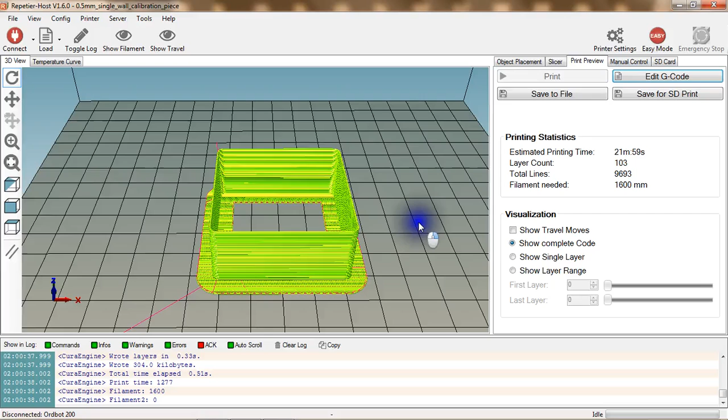Now we will show you the adhesion type options which you can use for printing your objects.

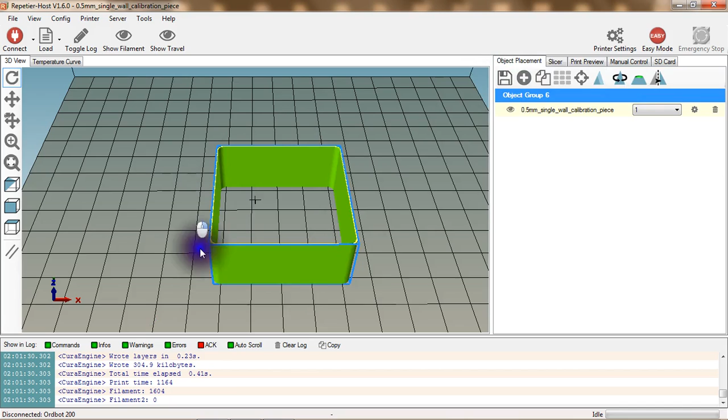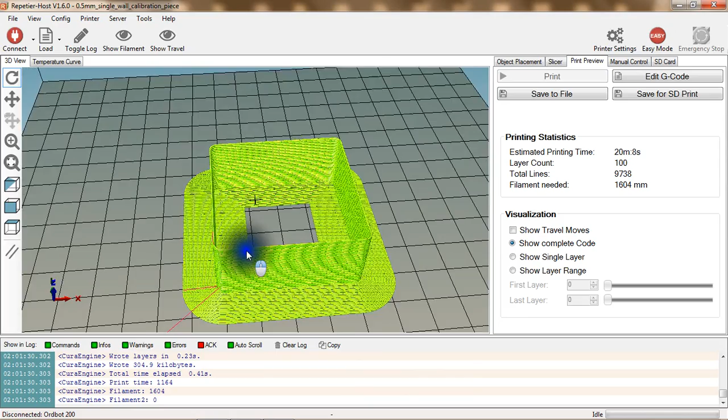Suppose this is your object on the print bed, and if you select brim here and slice it with brim, you will see that the original object is only this much. But if you see the sliced object, this is a part where the inside and outside of the box has some printed part. This is called the brim, which is printed on the outside perimeter of the box and on the inside as well. If this box had been solid, or had a base, the brim would have printed only on the outer side of the box.

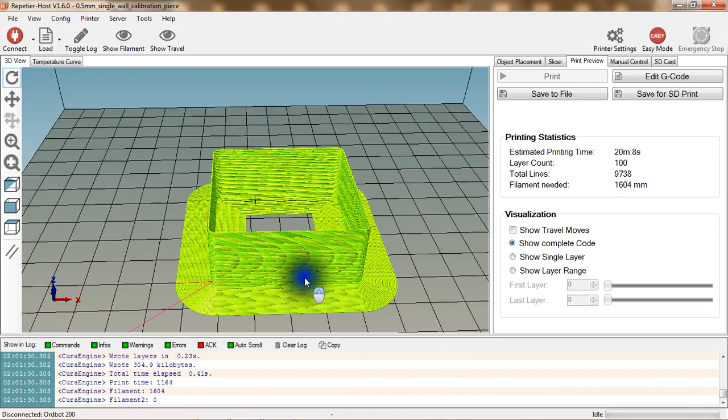The brim is actually useful if the object to be printed has very less contact area with the build plate. In that case, you can use brim to improve the adhesion of the object to the print bed.

Now if you slice it without brim, you will see that there will be no additional part printed, and it will only be the object itself.

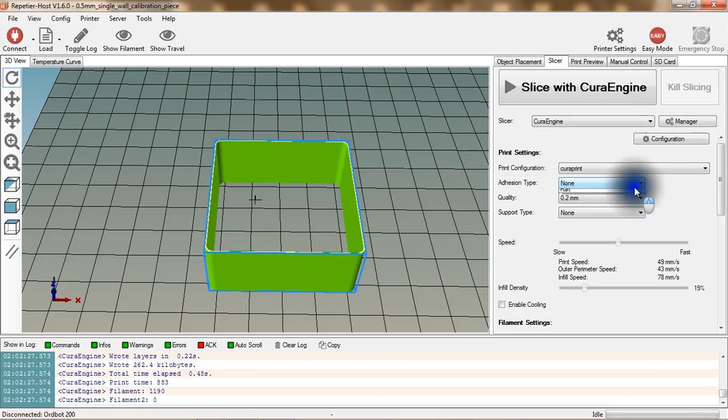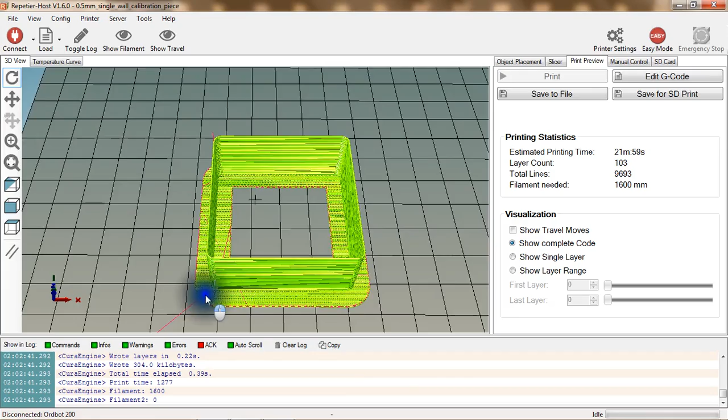Now if you select raft from here, you will see this object. Raft is also almost similar to the brim, but it covers the entire area of the object. So you can either print with brim or print with raft. Generally, first the raft is printed, and above that the entire object is printed.

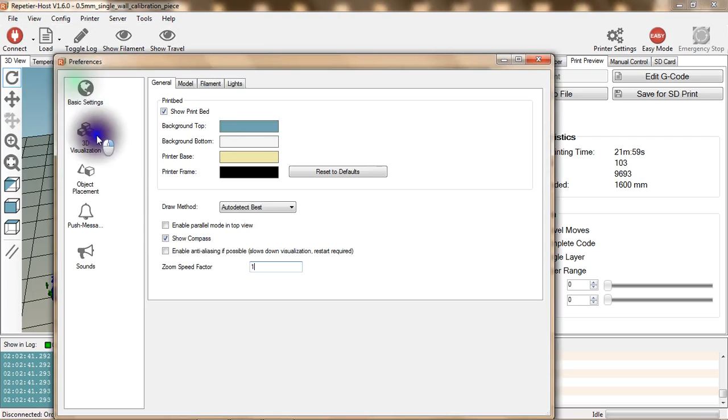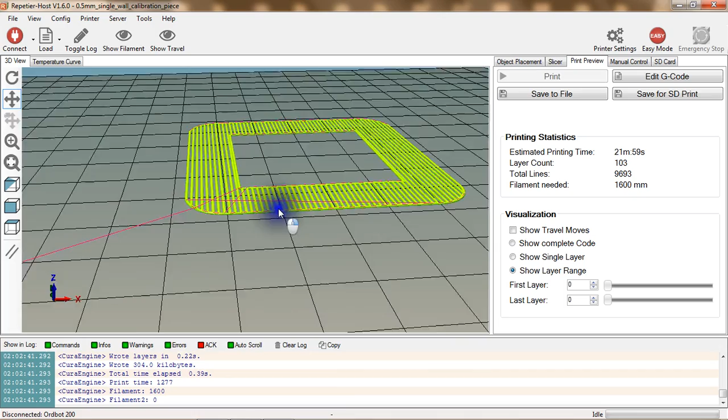Actually what has happened here, I will show it to you in more detailed way. Now if you see, this is the sliced version of your object, and if you zoom in on this object, so this is how your object will be printed. These are the individual layers or the lines, right? All of this is available in the next tab, the print preview tab, which is the third tab from the slicer.

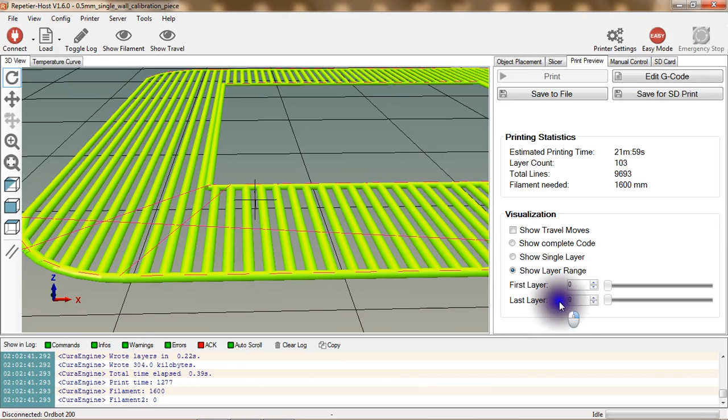This is the sliced part, the sliced version of your object. This is the first layer, or you can say this is the raft. If it's without the raft, suppose we select no raft and slice it, then you will see that there is nothing here. But if again you select raft here and slice it, you will see that this is the raft.

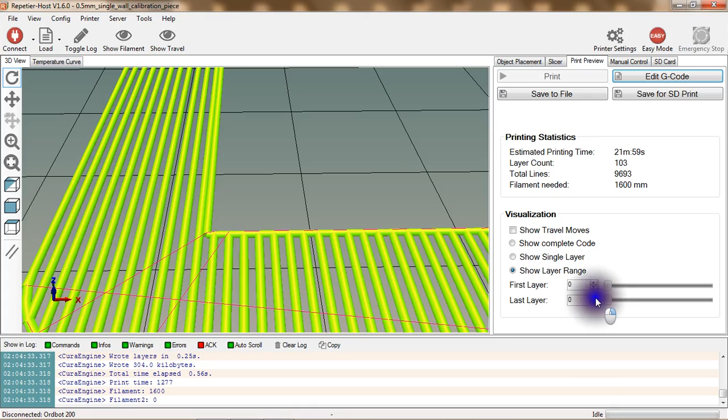So if you move it up by clicking on this, you will see that there is a change. First it will print the entire raft, this entire thing is the raft. First it prints the raft, and this layer which has come up, this is your main object.

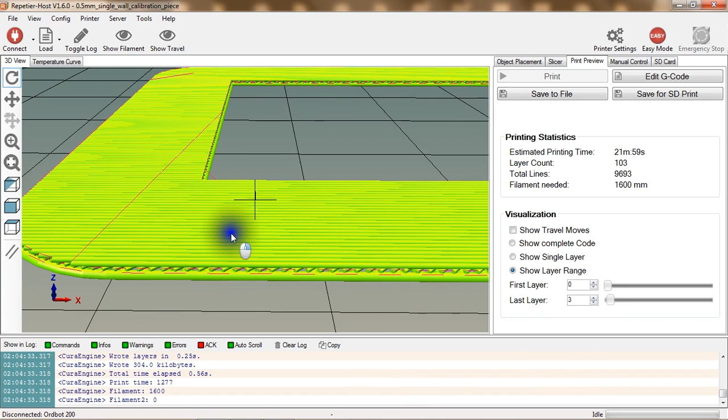So the difference between brim and raft is, if you make it zero, this is the raft. First it builds the entire base, which is called the raft, and above that base it starts printing the object. So this is your main object which is printed on the raft.

Now what is the difference between brim and raft is, if you select brim here and slice it, I will show you the difference. Now there is nothing here, and for the first layer, this is the brim. This is the first layer.

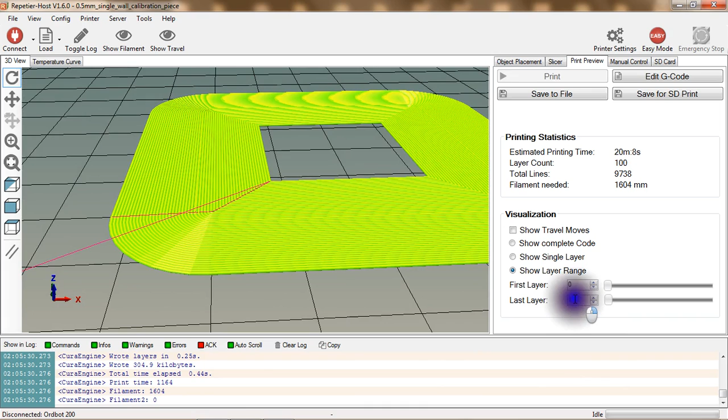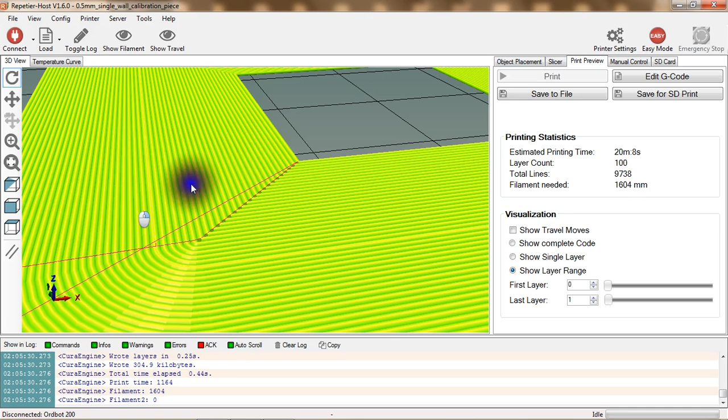Second layer. So this is the first layer, and the object is not printed on top of these layers, but in between the brim layers. It is just like a wall, and these extra layers are just supporting this wall from both sides. Whereas in case of raft, the object would have printed on this entire thing. In case of brim, the object is not printed on the brim, but is just supported by the layers from the inside and from the outer side of the object.

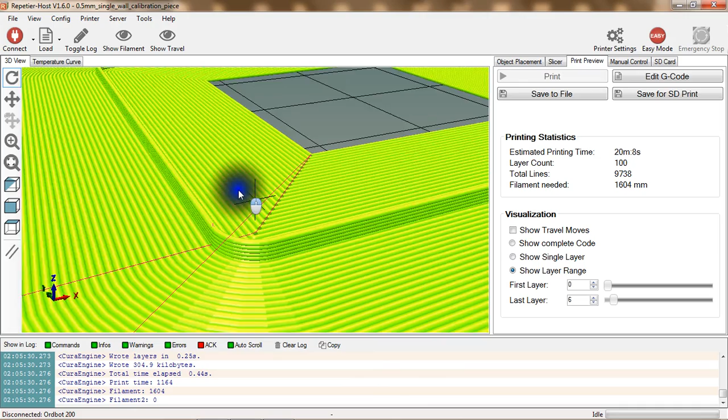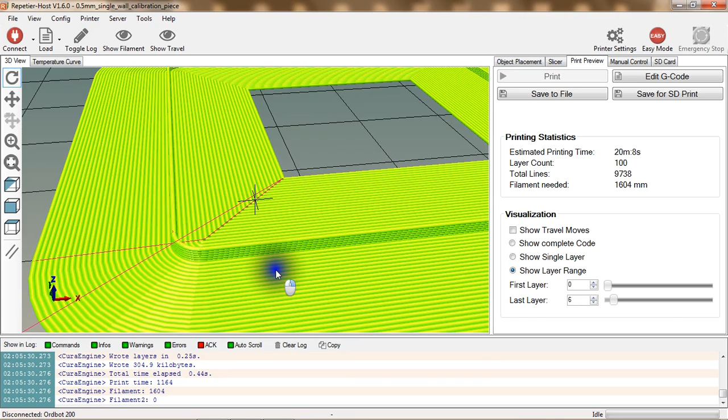So this is the difference between brim and raft, and both are useful in increasing adhesion. But if you are using the print method provided by us, you will hardly need the raft. Yes, you can use the brim for objects which have very less contact area with the bed. Printing with raft makes it difficult to remove the raft from the base of the object, and hence it results in bad quality of the print at the base of the object.

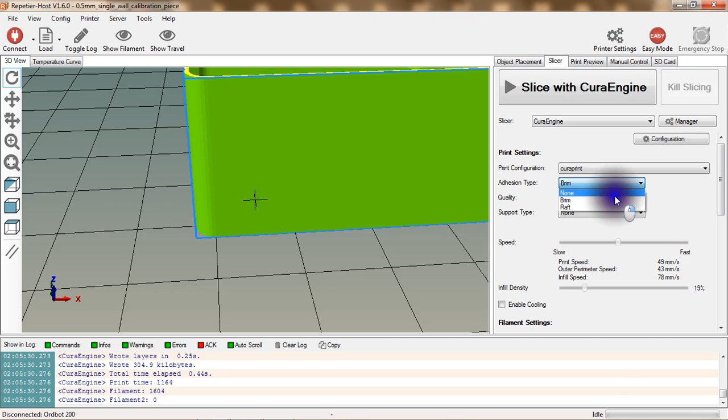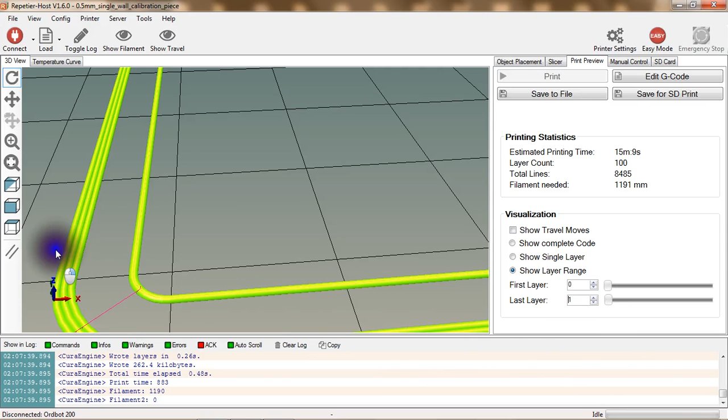So this is brim and raft. If you don't want to print it with any adhesion type, you can select none and click on slice. Now you can see this is the sliced version without brim or raft. These three lines which you see here, apart from the object, are called the skirt. This is your main object, which is building upwards.

These three extra lines are called the skirt, and you can change these settings by going into the CuraEngine configuration, going into the structures tab under the print tab, and if you scroll down, you will see skirt and brim.

Skirt line count 3. We have made the skirt line count 3 here. That is why you are seeing 3 lines, right? 1, 2 and 3. 3 lines.

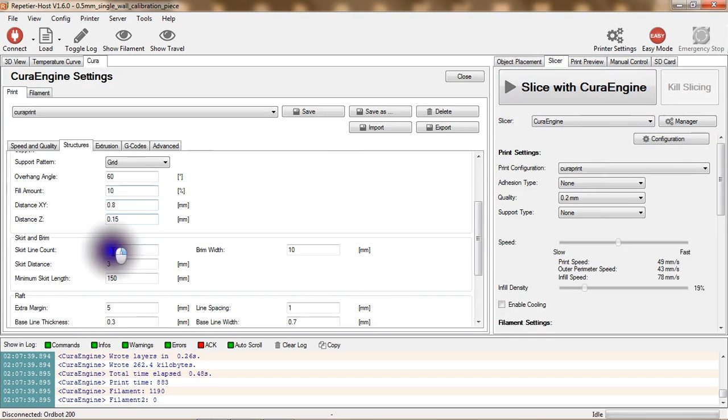So if you change it to 1, whatever changes you make here, you will always have to click on the save button. Otherwise they will not be available. And then you slice it again, and there you go. You see that there is only 1 line.

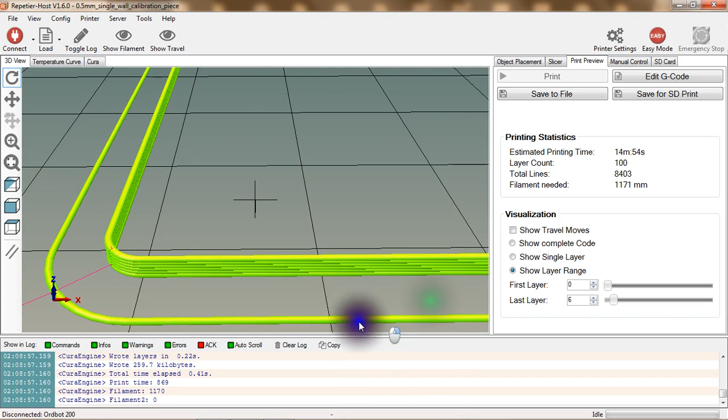So actually this skirt is helpful in priming your hot end. First the printer will print this skirt, then this perimeter, and after that it will move on to the main object. This helps in filling your hot end with fresh melted plastic, and whatever residue plastic is from the last print, it will be extruded while printing this skirt.

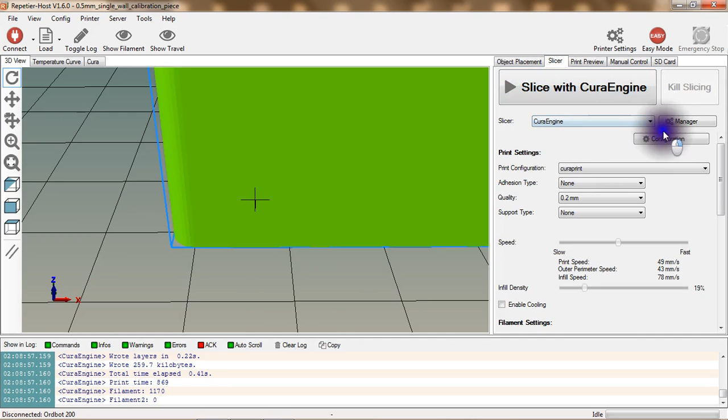It is always advisable to slow the speed of the printer while printing the first layer or the skirt, so that the hot end is primed properly, filled properly, and the extrusion has started in a proper way. So when it reaches the main object, there is no problem in extrusion and it is coming out properly. You can go to the slicer configuration tab, and if you set it to 0, there will be no skirt and the printer will start printing the object straight away.

Now if you see another option, that is brim width. As we have shown you what brim is actually, if you reduce this number or increase this number, the brim width on the horizontal side will increase or decrease.

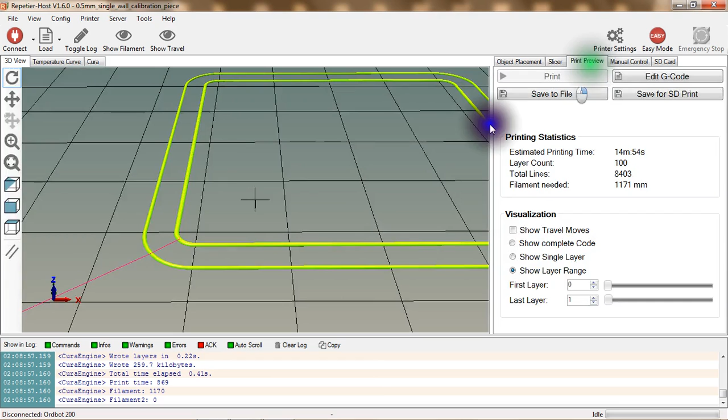This is the skirt distance, that is how far away this skirt will be printed from the main object. So if you reduce this, give it 1, save and slice it again, the skirt will move closer to the main object. Similarly, if you increase this distance, the skirt will increase. So we'll keep it at 3 right now.

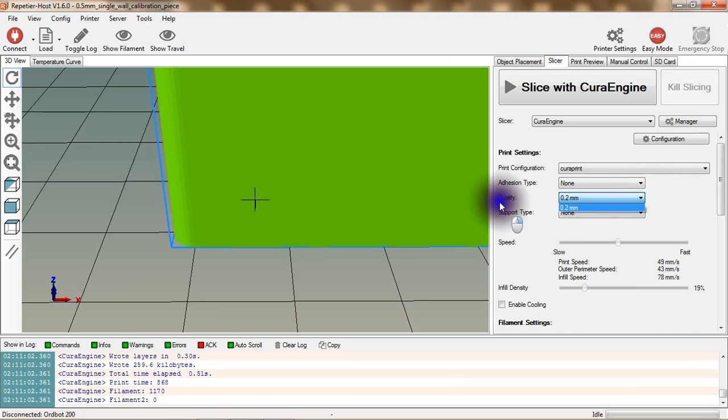So this is about skirt and brim. This is quality type, that is your z-axis resolution, or which is generally referred to as layer height, that is 0.2 mm.

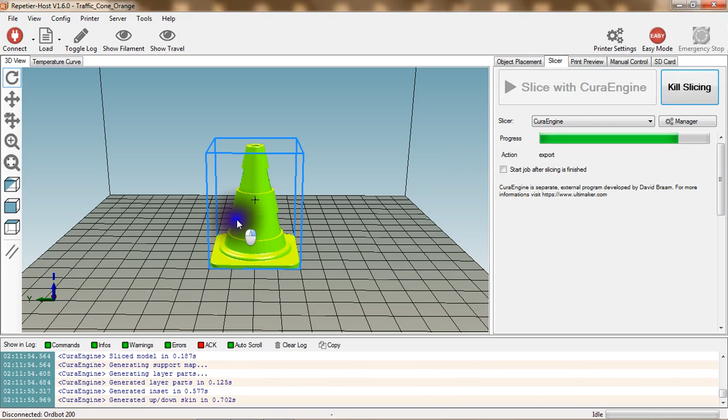Now we come to support type. For that we will select another file. Suppose this is the file that we have selected. Now if you print this object as it is in this orientation, you will not require any support. Even if you select support from the option and slice it, the slicer will not put any supports here because there are no supports required as per the various settings. So no support is required here.

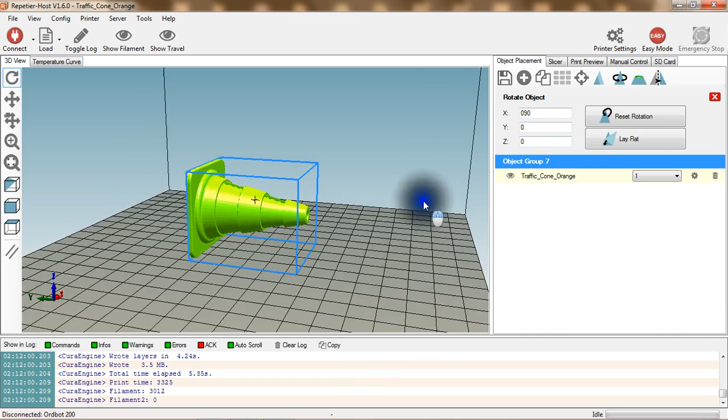But if we reorient this part, say if we rotate it 90 degrees like this, now if you want to print this object, it cannot be printed as it is. It can be printed only with the help of supports in this orientation. So for that you will go to slicer, support type. If you click touching bed and slice it, then you will see the supports in the sliced object.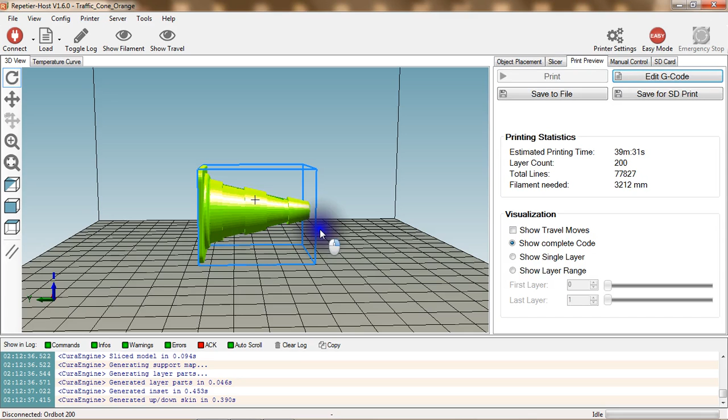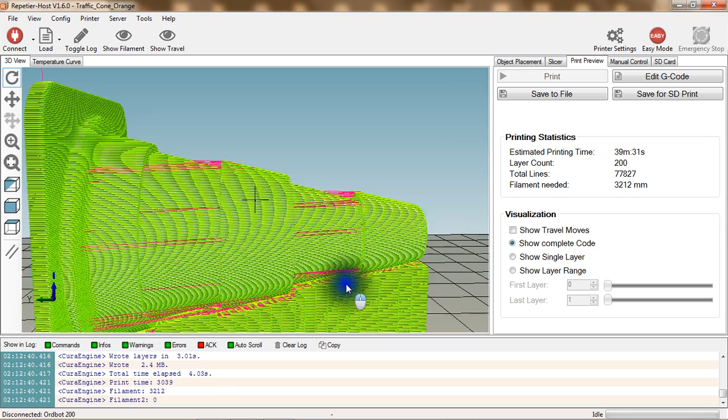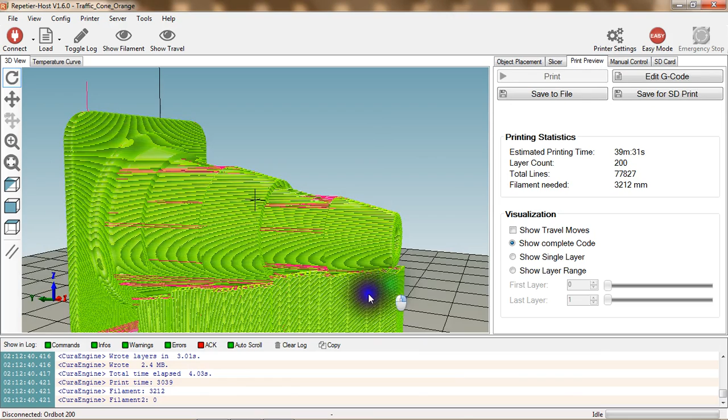You can zoom in. And there you see that all this is the support object. If you see the main object, it is like this, and if you see the print preview, all these structures which you can see, these are the supports.

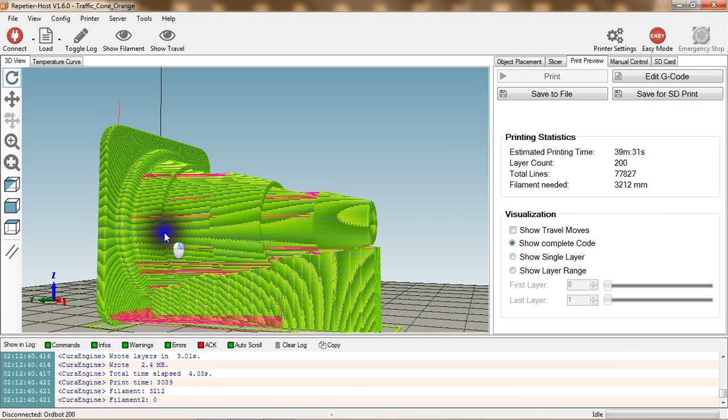So once the print starts, first these supports will be printed, and on that the entire object will be printed. So this is exactly how your part will be printed. Whatever you see in the print preview tab after slicing your object, that is how your part will be printed on your print bed. So if there is any issue or problem in the print preview, you will have to rectify your file, orientation, or any other setting in order to get it right as per your selection.

In print preview, there are other settings also. There are other statistics like print time, the amount of time your object will take to print. This will take 39 minutes 31 seconds. This time will not be exact, it might be slightly more or slightly less.

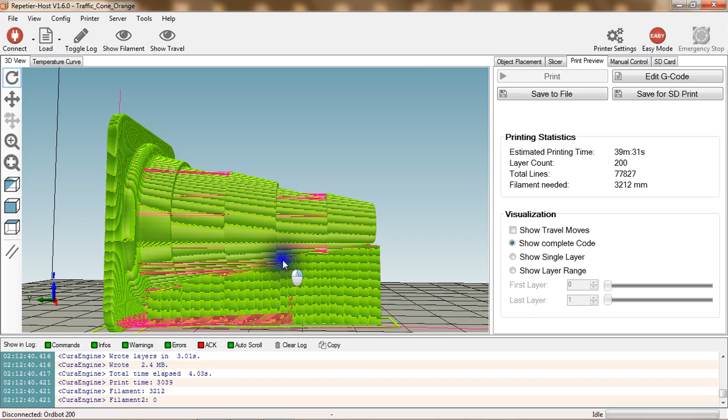This is the layer count, that is the number of layers in which the software has divided your part as per the layer height you have selected. We have selected 0.2 mm. So as per that, the slicer has sliced it into 200 layers, of which every layer has a height of 0.2 mm. Total number of lines and the amount of filament needed is 3212 mm.

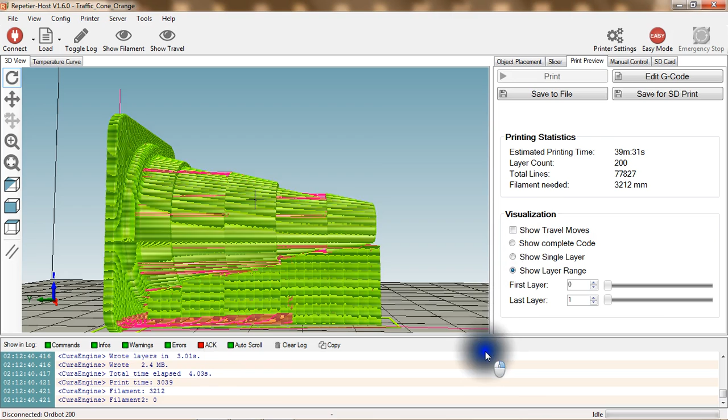So from this tab you can get the idea of the time and filament needed for printing this object. Now if you come to visualization, you can see the complete code by clicking on this button, and if you want to see how the entire object will be printed, you can select this option, the last one, show layer range, and if you rotate the view...

Now I will show you how to understand this. You see this black dot here, this is your home position, just assume that this is your printer and it is facing you. Now the hot end will come to this position for homing, it will touch the Z axis by moving down, and stop, then it will move up till this height where you can see this purple line.

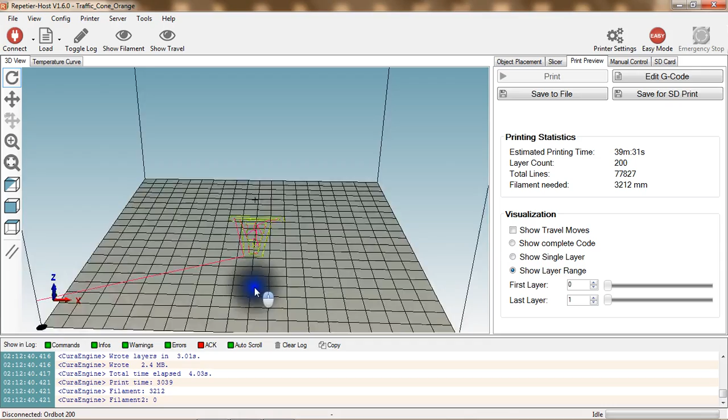It will move up to this height, and from there it will go down like this. As you can see this purple line, it will go exactly in the same manner, and it will come to the center, or wherever you have placed this object. It will come to the center, and all the purple color, or it may be a different color in your software as per the setting, this shows the path of your extruder, how it will move while printing.

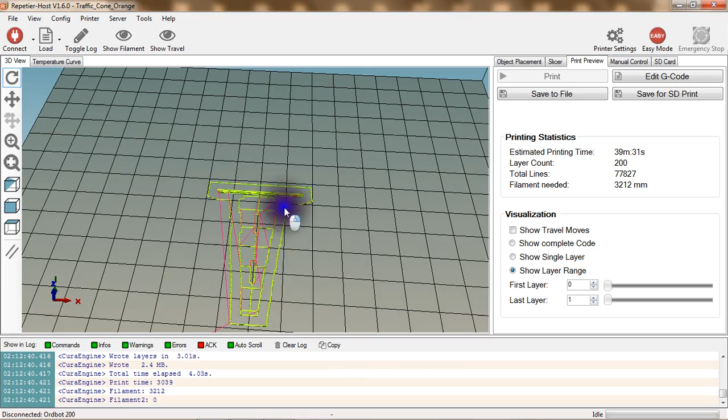So if you see this yellow, purple path, it will first come like this. It will start printing from this point, then it will move like this, then from there it will come here, and so on. This blue path denotes the path of the print head.

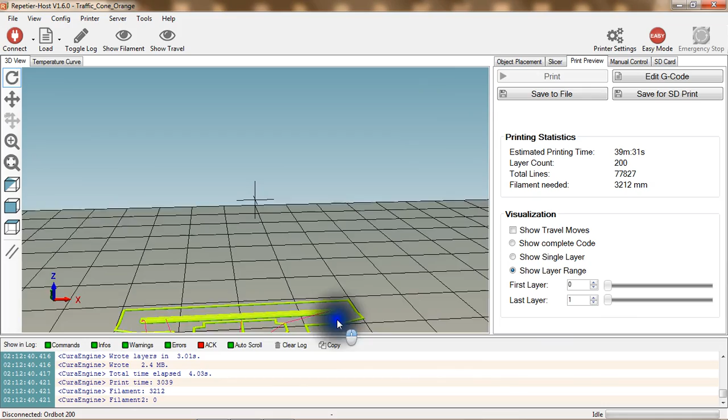Now this is the first layer. If you select 0, it will not show you any layer. So now this is the first layer while printing. Now these options will be very helpful in seeing a zoomed or close-up view. This is the first layer which the print head will lay down on the bed.

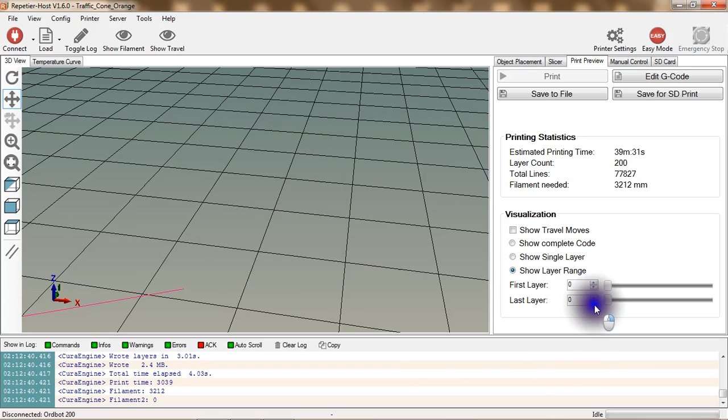Now if you keep increasing, this is the skirt which I had shown you earlier, and this is the main object. Now if you zoom in and click on this, you can see that the object is increasing in layer height.

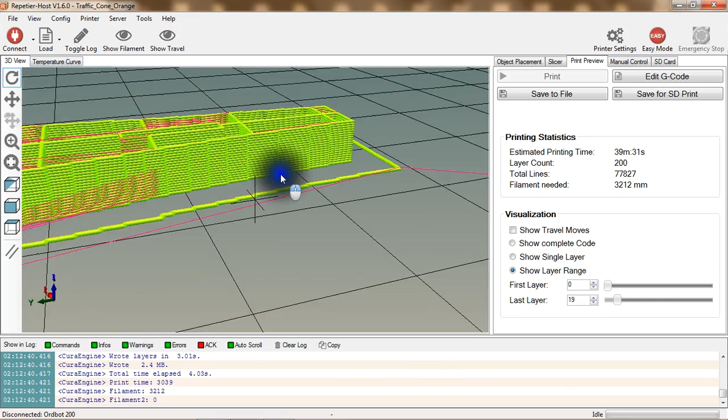Right, it will keep on increasing, and this is the support. All this part which you are seeing is the support material which it is printing. And there, from this point, the entire object will be printed on the support material.

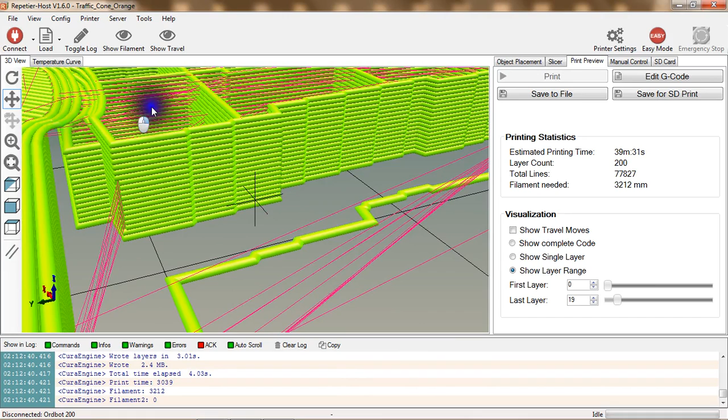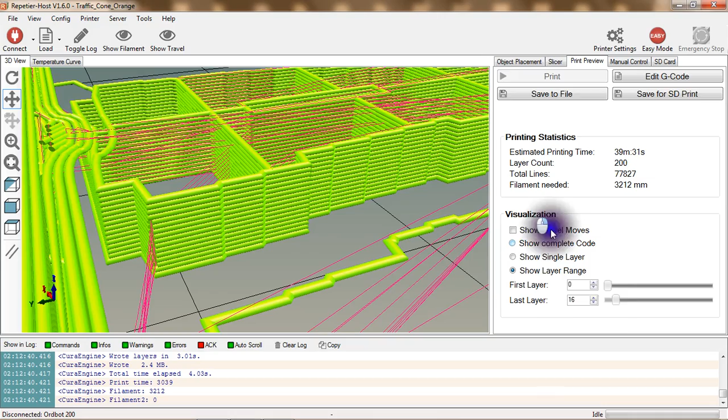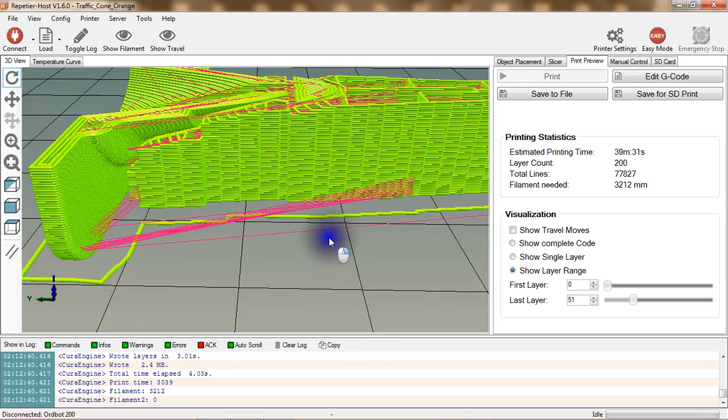Right, so you see this entire thing is the support. First it has printed support, then it has slightly joined this part, and it will bring the entire part on the support. So it will print the main object on the support part. Now you can see that it is building this, this is the main object, and this is the support, and it will keep on printing it.

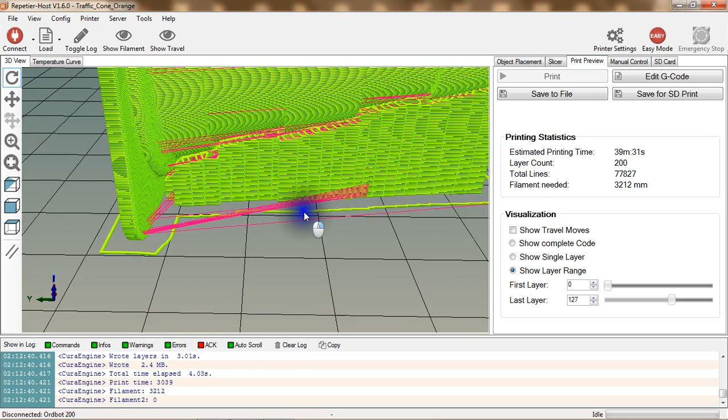There you go. This is how the entire object will be printed.

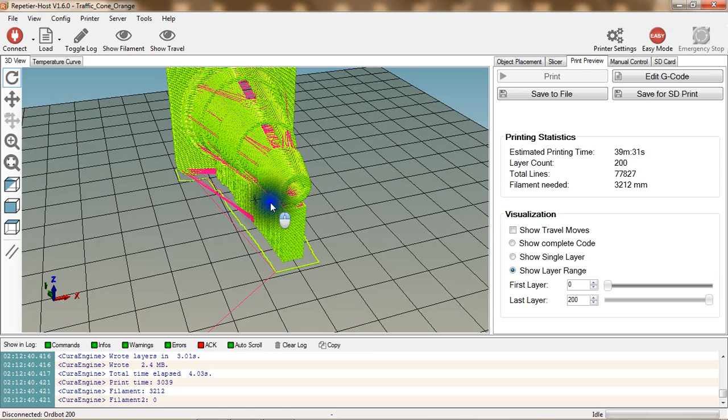So with print preview, you can get a very good idea about how your object will print, or if you have any issue in the slicing of the object.

Now from the print preview tab, once you have sliced the object, you can save your object for printing with the SD card. You can either go to save to file or save for SD print option. If you click on save to file, it will be saved. Don't change the extension because we want it to be saved with the G code extension. Keep the extension as G code, give it any name, and save it in the SD card.

Once you click the save button, after giving any name to your file in this tab, if the file is big in size, the software will take some time to save that sliced file into your SD card.

So don't just take out your SD card immediately after clicking the save button, because if you do that, the file will not be saved, or it might be saved only partially, and it might print only up to the point where the file has been saved, resulting in a half print or a failed print.

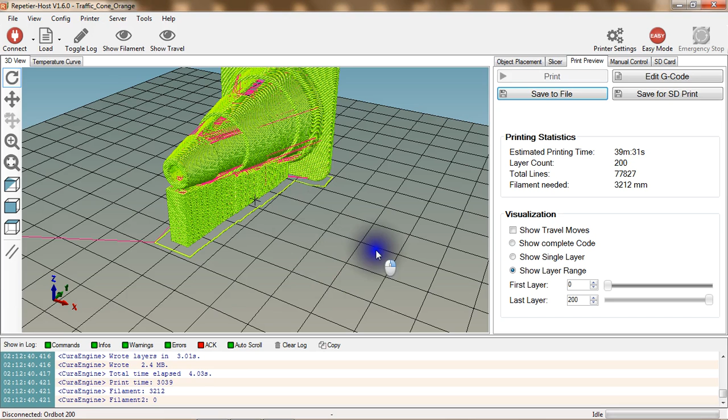So the best thing is to wait 10, 20 or 30 seconds if the file is big enough. If the file is too big, the software will show 'not responding' on the top area. But there is nothing to worry about, once the file is saved in the card, it will automatically start working again. So keep this in mind.

So this is how you save your file in the SD card for printing.

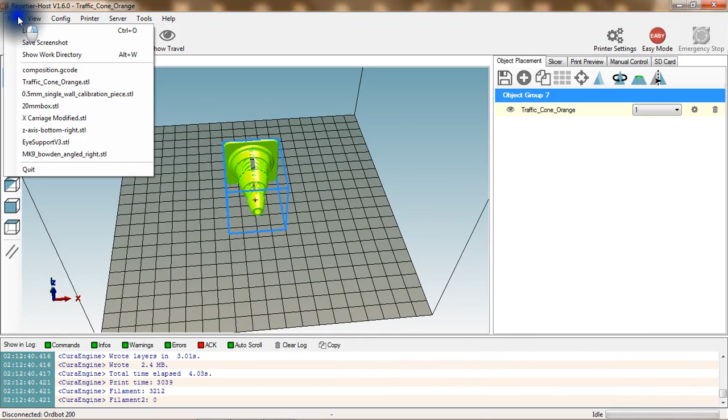In short, you first have to go to the object placement tab and drag and drop any object in this area, or go to load and select any object. The object will be placed in the grid area. You can either rotate it using this option, scale it using this option, or move it by selecting it on the build plate.

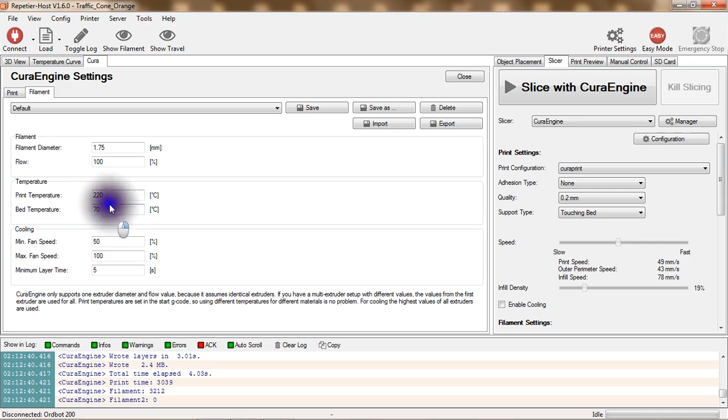Once you have done that, you can go to the slicer tab and make any changes you want in the configuration of Cura, then click on save. You can go to filament settings, change the temperature or other settings, click on save, and close. You can select any adhesion type, select the quality, and select support if you want, then simply click on slice with Cura.

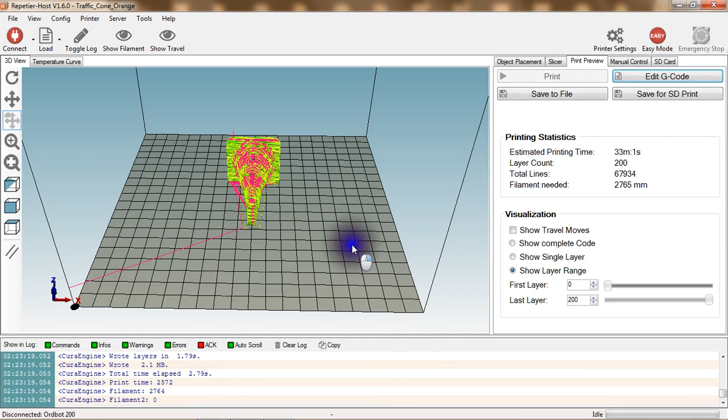In this way, your object will be sliced for printing with your printer, and then you can click on save to file or save for SD print, and save the file by any name in your SD card. So this is the entire process of preparing the file with Repetier Host and Cura engine for printing with OrdBot Hadron. Now we have forgotten to tell you one more thing.

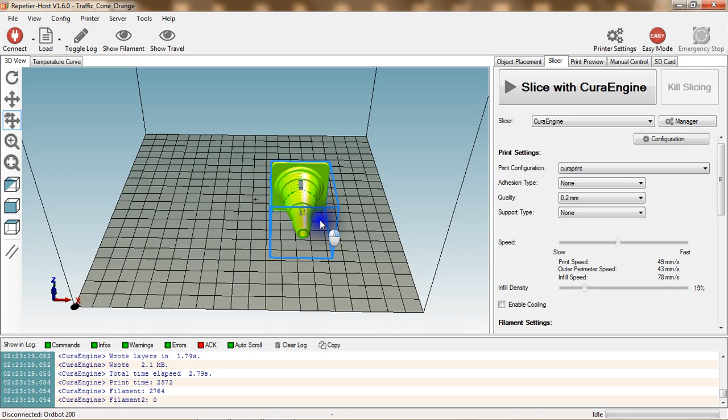This is the infill density. Infill density is actually the amount of plastic which will fill the object. Now I will select another object for that purpose. Suppose we have this 20mm box, and suppose the infill we select is 10%.

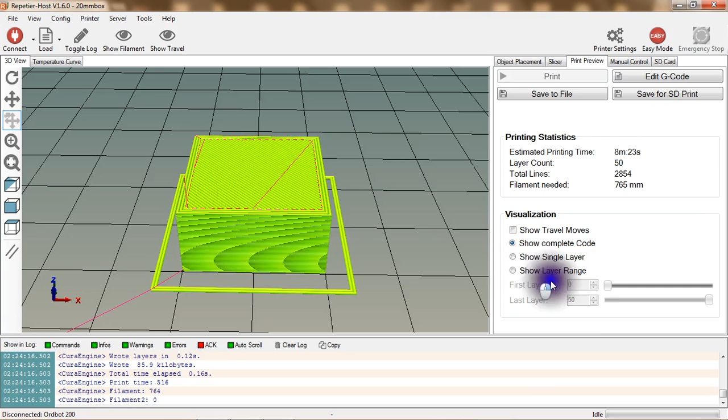This is something which you can change very frequently. And if we slice it, so now if we move this object, this is how your object will come up, and these things you are seeing, these grid sort of things, this is what the infill is.

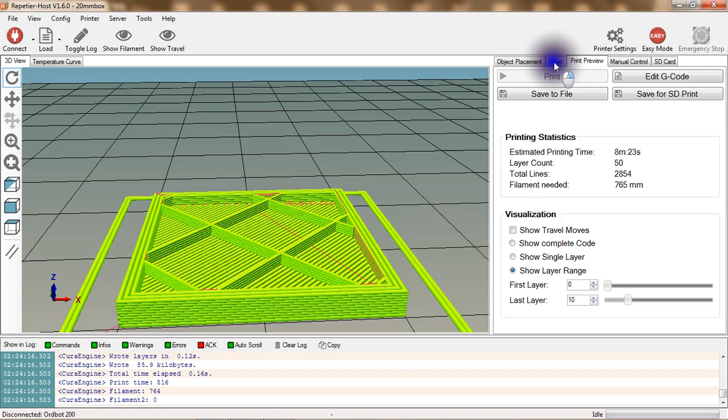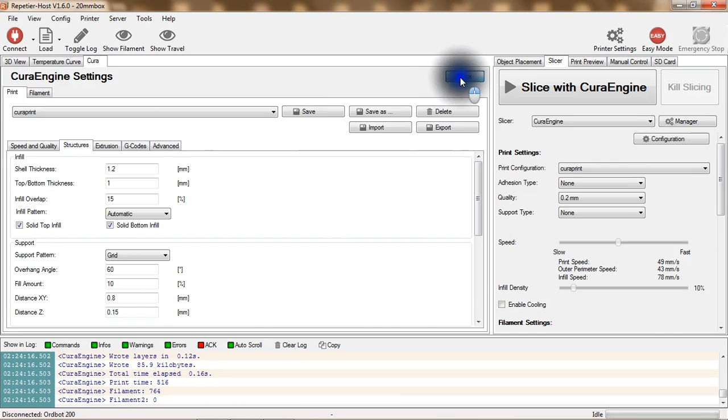This is the infill, this pattern is the infill. This pattern can be changed by going to the slicer again, configuration, going to this pattern, the structures tab, and selecting the infill pattern—grid, lines, concentric, or automatic—and just clicking on the save button. Whatever changes you make there, save them, slice it again, and you will see the changes in the print preview tab.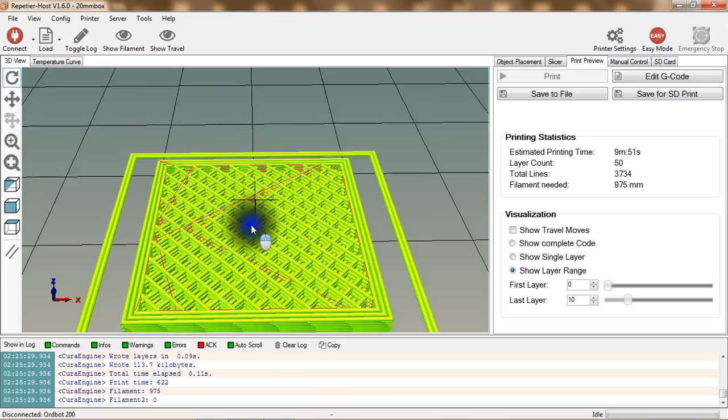So this is the infill. Now if I change infill from 10% to say 30% and slice it again, you will see that those grid patterns have increased in numbers. It means this part will have more strength compared to the earlier part, but this will take more time and more material as well. So this is what the infill is.

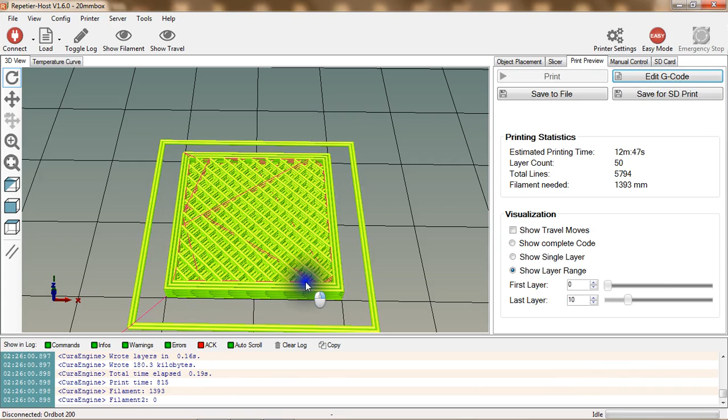Now suppose I increase this infill to 60% or 70% and slice it again, then these patterns will again increase in number and become smaller in size—that is, they will increase in number and the density of the part will increase, and you can see that the time taken and the amount of filament will also increase. So infill actually makes the object stronger, heavier, and increases the time and amount of material required to print it.

So one has to choose the infill percentage carefully as per the object's application. If the object is only meant for aesthetic purpose, it is generally printed at 10%, 20%, or 15%. If the object has to be used as 3D printer plastic parts, it can be printed at say 30% or 35%.

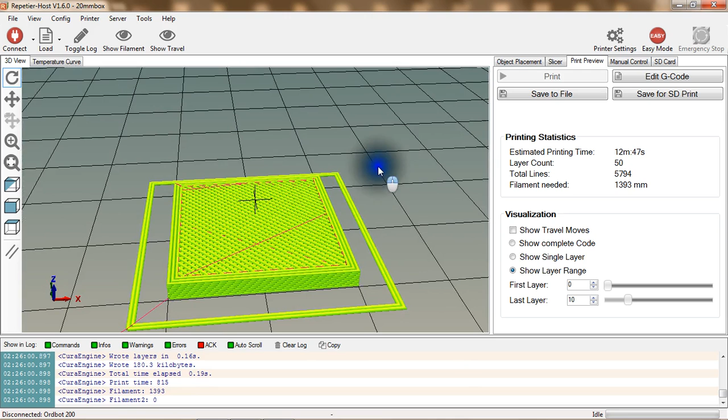Or if it has to be used where temperature is a concern, such as extruder parts or other parts, you can print it at say 50%, 60%, 70%. But generally parts can be printed at 30% or 35%. If objects are meant only for aesthetic or display purpose, generally 10-15% is more than enough, and at 30-35% the objects are also very, very strong. So this is what the infill is.

If you select this option, enable cooling, the print fan will automatically start moving after the first layer. At the first layer the print fan has to be switched off, and by default it is off, because if you run the print fan at the first layer, the melted plastic will not stick properly to the bed and it will result in warping of the object.

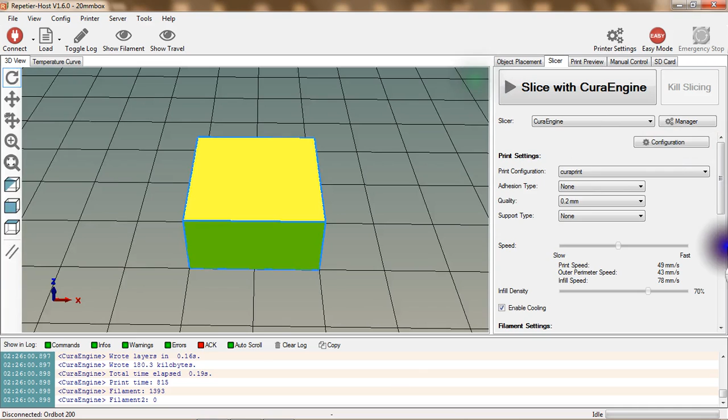Filament setting: you can select the profile which you have saved in the configuration filament tab here. That is the same profile you will have to select in filament settings—we have selected default here. Now you can click on slice with Cura engine and it will be sliced. To see the complete sliced code, click on this button, and to see the travel moves, click on this button.

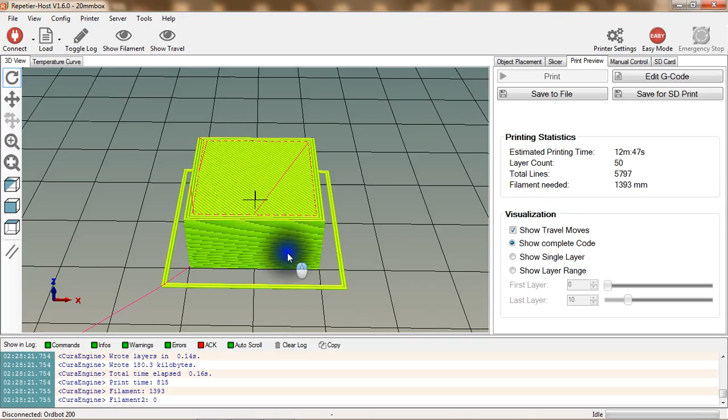So this is how the entire process of preparing your file for printing with Ordbot Hadron is done. You can click on save to file, save for SD print, or if you have connected your printer to your laptop or PC with a USB cable, you can click on this print option and the entire print process will begin. Since we have not connected this to the printer, that option is not available here.